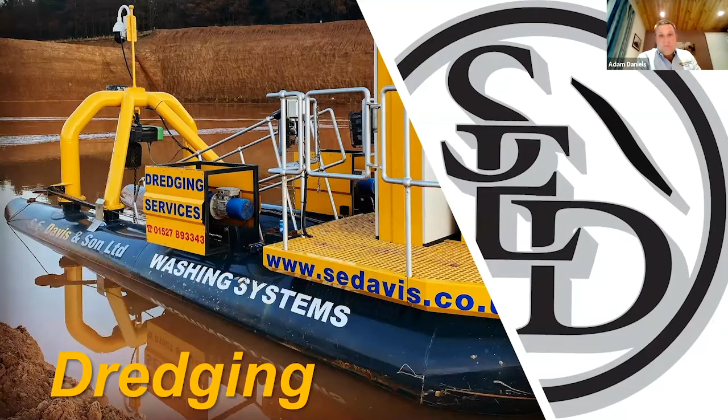I'm Paul Davis. I'm fourth generation of SE Davis and Son Limited from Worcestershire, and we're primarily crushing and screening and plant hire. So the origins of the business: the yard, which is 25 acres, was bought in 1930 off the University of Oxford as a research site. It had been since 1870, and it was where they experimented with bricks and clay. There was a brick kiln on the site, and also a sand quarry.

The farm was bought in 1930 as a derelict quarry, and it was backfilled in 1939 by the War Agricultural Committee. And my great-grandfather, SE, Sidney Ernest, started a chick hatching and poultry business. That grew through the 30s and 40s, Second World War, and in the early 50s, we started in lorries, hay and straw haulage, and moved on to demolition. Demolition contractors all through the 70s and early 80s, when my father took the business in a different direction in the plant hire.

So the plant side of things then really took off, and we started crushing in the late 80s, early 90s, and we travelled all around the country as crushing contractors. By the end of the 90s, things were slowing up a little bit on the crushing front, and we started looking for something else. And in the mid-2000s, we hit on the idea of washing quarry waste in many different forms. And the dredging was born on the back of that.

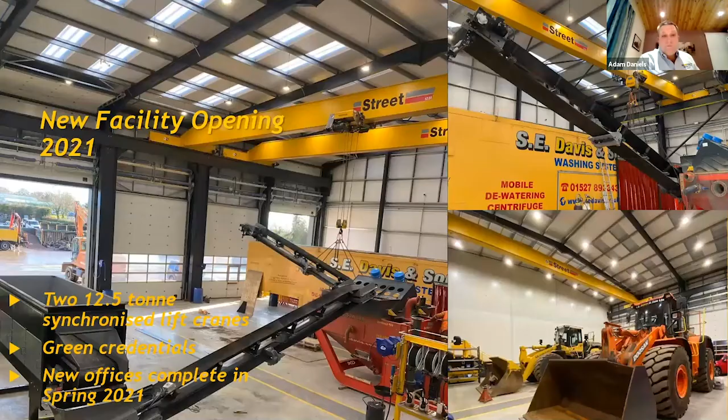We have two 12.5-ton synchronized lift overhead cranes. So we've got 25-ton lifting capacity with all our own in-house fabrication facilities. The plant that's on the screen at the moment is going to Tor Works for a dust washing project, and that's currently being built, due to be finished next week.

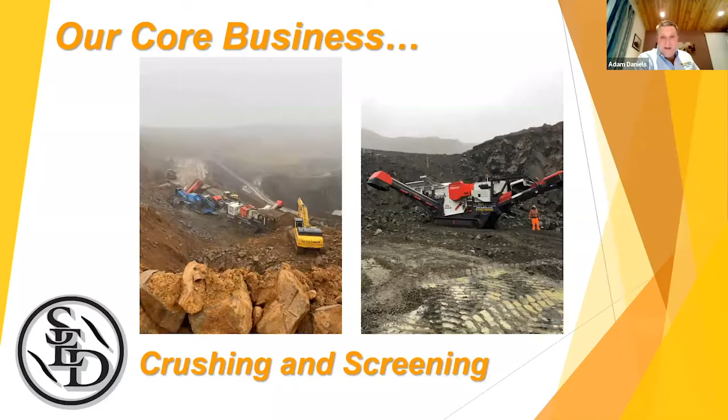Our core business, as I've touched on, has always been crushing and screening and aggregate processing. These couple of pictures here are in Cleal Quarry, where we're processing blasted rock into type 1 and into single sizes. We run 6 crushers, jaws and cones, and 14 track screeners. So, mineral processing is what we've always done.

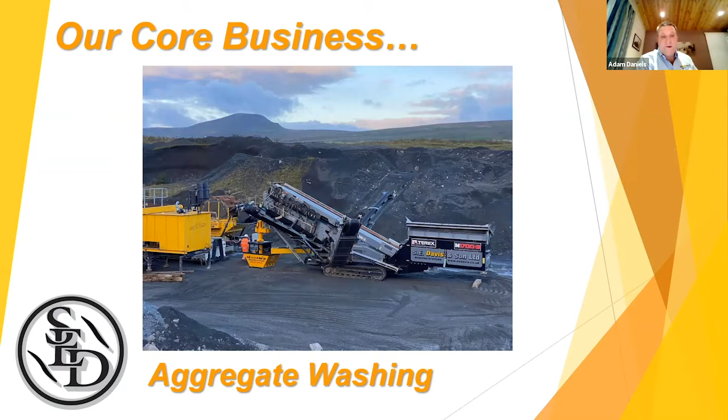The washing plants, as I said, were born out of working in quarries, seeing the heaps of waste and problems, scalpings, dust, anything else that might come about. And we designed our washing systems to be very mobile, very quick to set up, with a very small footprint. We don't need concrete slabs to set them up on. We arrive on site, normally the crane work's done within a day, and we're up and running within 2 days. That's the core of our business.

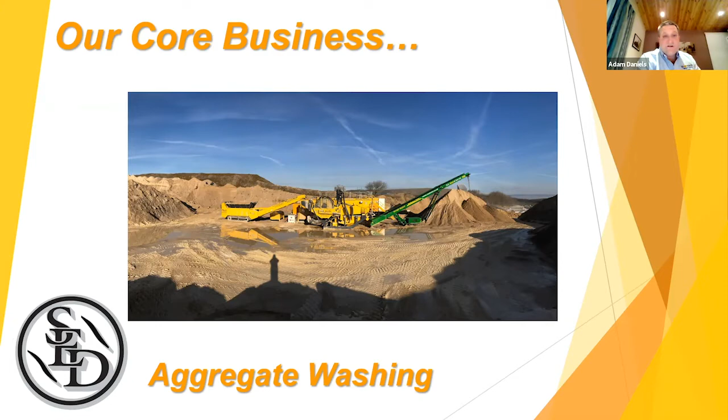Dowlow Quarry, where we were washing dust. We did 75,000 tonne of a 6 mil down dust for them up there. As I said, our plants are modular, and most of them are built by ourselves.

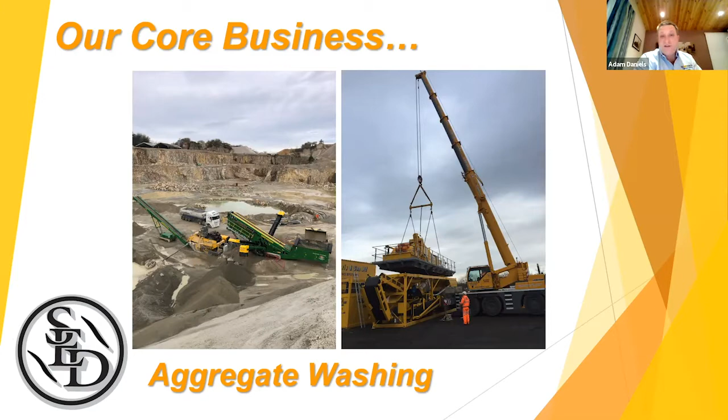We then treat the water through a centrifuge and a settling system, and reuse the water within the system. So washing 1,000, 1,200 tonnes a day, and we're using no more than about 6 cubic metres of water an hour to process that material.

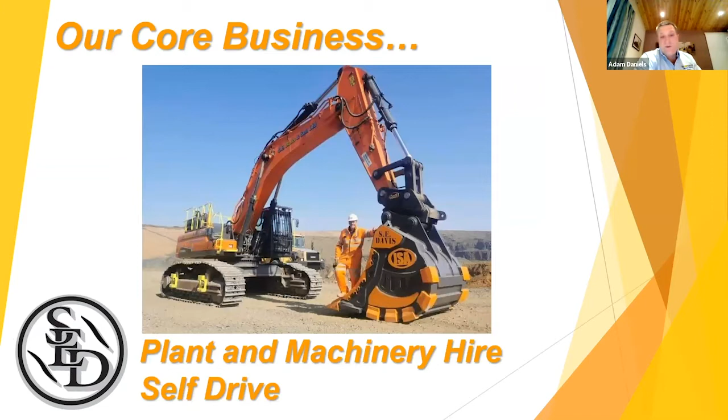We have a large fleet of self-drive and operated plant hire as well. So all of this equipment that we're discussing is building up to the dredging project, because we'd got the infrastructure to start with, we'd got the roads into the quarry, and we knew the people. So it was the next logical step really to do something like it.

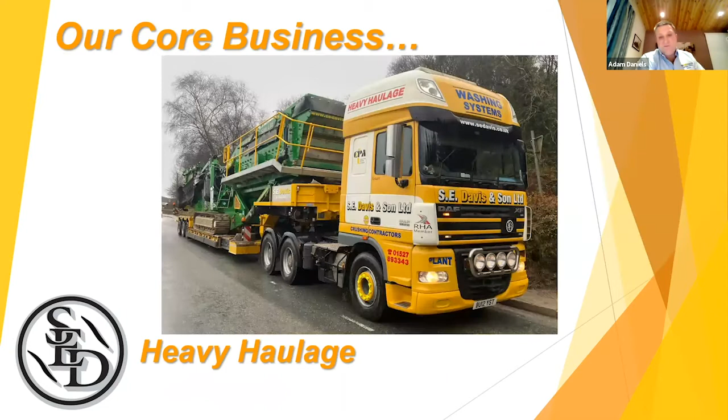We run all our own transport and our own cranes. Most of what we do, we set up ourselves. We run a large fleet of Arctics, heavy haulage capacity up to 70 tonnes, step frame and low loaders. So we're not reliant on other people's haulage. We do everything in-house ourselves.

So how did the dredging come about then? So about 6 years ago, we were approached by Brett Aggregates in Pinewood near Iver to clear a silt lagoon out. They'd had a long reach excavator in, which, due to the nature of where it was, could only reach 6 to 8 metres from the bank, because the silt lagoon was very deep, which then gave them a short-circuiting problem in the lagoon.

We've got a large collection of vintage and classic plant, so we rebuilt a 22 RB excavator, a heavy-duty machine, and we were able to dredge the lagoon for them very effectively. Our wash plant was feeding into the lagoon, so we were filling the lagoon with silt. So if we could offer the quarry a solution to move the silt, then all well and good. So we dredged that 2 or 3 times for them, and it worked very well.

Because we then started advertising a bit of dredging, more people got interested. There was a bit of a campaign on social media, and we were approached by a paper mill from Winchcombe in Gloucestershire about clearing a tailings pond for the paper mill.

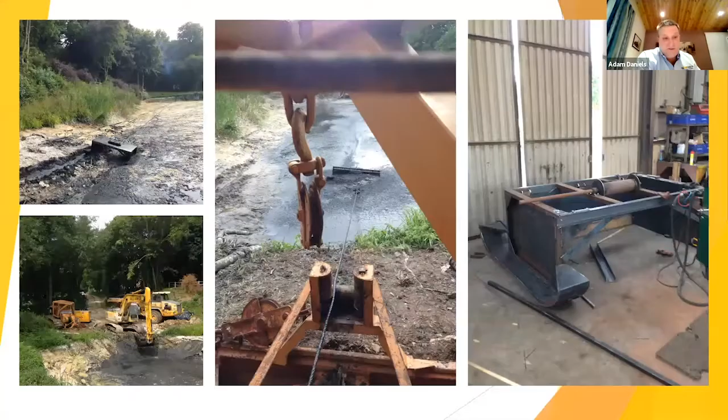So this was a job we did for the paper mill. We used a D8 tractor that you can see in the bottom left-hand picture. It was 145 metres across the lagoon. That D8 tractor was built in 1934. The air conditioning is fantastic, as long as the wind's blowing the right way.

And we pulled the scoop backwards and forwards between the D8 and a Unipower winch tractor on the other side of the bank. And we pulled it up to the front end, and then had one of our excavators loading a 40-tonne truck and tipping the slurry into a pre-made lagoon. And it all worked very, very well. And we could see from that that the dredging had really got legs. There was definitely a market for it.

Nothing more really happened then for a couple of years, other wash plants and various things, until I had a call from Adam from Sibelco. And in typical Adam style, he came up with a list of requirements that were not only impossible, but they were slightly insane. He wanted a dredge that had got no man on.

It couldn't have any diesel fuel or hydraulic oil. No fuels, oils or greases at all on the dredge. It had got to be completely remote control. It had got to dig 5 metres deep. It had got to pump the liquid 700 metres away with a static head of 40 metres.

And I got quite excited and thought it was a brilliant idea. And as a family, as I've said about the family business, we have a meeting on a Sunday night where I sort of come to the family and said, look, I've had this idea. Adam wants us to build a dredge. There's work there for it. I think we can do it. And when everybody had finished laughing, the resounding answer was absolutely not. You must be off your rocker, we're not getting involved with floating things on water.

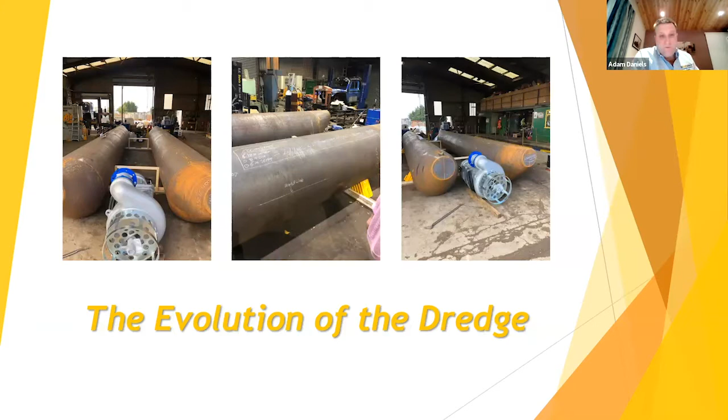So you can see there the 2 pontoons. We spoke to a firm in Italy called Dragflow and got them to design a pump for me to do exactly what we wanted, which was a high flow, low head pump. And the build commenced. We had the pontoons made by a firm in the Black Country who built them to exactly what we wanted. And we set off from there.

Now, as I went on building this thing, it got to a point where it was very nearly constructed. And everybody kept saying to me, well, do you think it'll float like? And it's so demoralizing, really, when everybody who's working for you, including the family, wonder if what you're doing is actually going to work. So I lost the head with it one afternoon, and a friend of mine owns a marina about 10 miles down the road. So I said, right, we'll see if it'll float. Let's go and put it in. So took it on the wagon and took the crane and dropped it in, and it worked perfect.

But the night before, stood in the workshop, everybody was looking around it, asking whether they thought it would float or not. And they got me to draw a line on the side and sign my name above it to see where the water had come to. And I must admit, I was 7 mil out. So it didn't do too bad, really. Now, from that successful test, we went on with the winches and the electrics and got the thing finished.

And this is it going in for the first time in North Devon into the clay works there. And it was good. It performed as well as could have been expected, really. One of the other problems that we faced was how to move the material away from the dredge. The pump will pump up to a 60 mil solid, and with this job we needed to pump it 700 meters, and we got 40 meters of static from the water line up into the lagoon that was made on the tip. So we used an automatically controlled booster pump system.

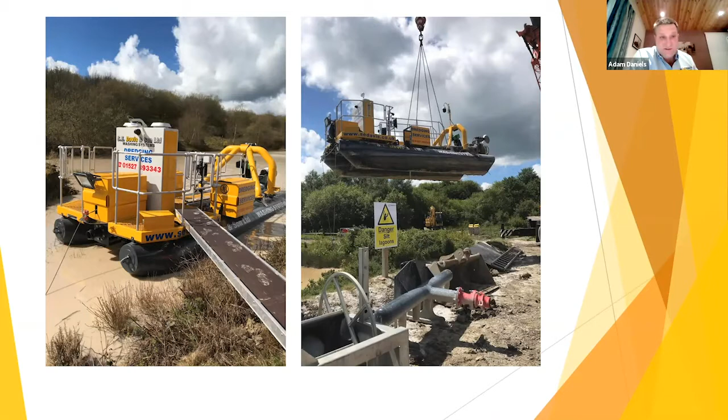So there's no manual handling, there's no joints and lifting pipe work. It's lightweight. It's an easy system. And then at the end, you just reel it back up with a hydraulic reeler on the excavator, and off you go to the next job. Weight was an issue because we couldn't get the crane too close to the edge of the lagoon. So we kept the weight to around about 6 tons. And so the rest of it's history, really. The dredge is controlled by a cabin on shore, and the operator sits in the air-conditioned cabin and watches the dredge working.

You can see on that picture there the 2 winch ropes coming off the front. There's 2 ropes on the front and 1 rope on the back, and you sort of steer yourself across the lagoon in an arc fashion.

So the things that we got wrong when we started, we had the pump sticking straight out the front of the ladder, because the idea was we'd be digging at around about 5 meters deep. So by the time that the head went down, you were at an angle where the pump was very nearly vertical. And then we had the stirrer mounted above the top of the pump with the idea that it would agitate the liquid around it, which worked fine on the Devon clay.

But when we moved up into Cheshire, into a lagoon that had a high sand content, it just wouldn't do it. You were trying to pull the pump sideways into a solid bank all the time. So we made the pump so we could vary the angle of the pump, and we also added a second stirrer and mounted it on the side.

And a little later on, there's a video which you'll see, it was digging sand that was half a metre out of the water down to about 5 metres in the lagoon there up in Cheshire. And we were pumping that around 850 metres to its final destination.

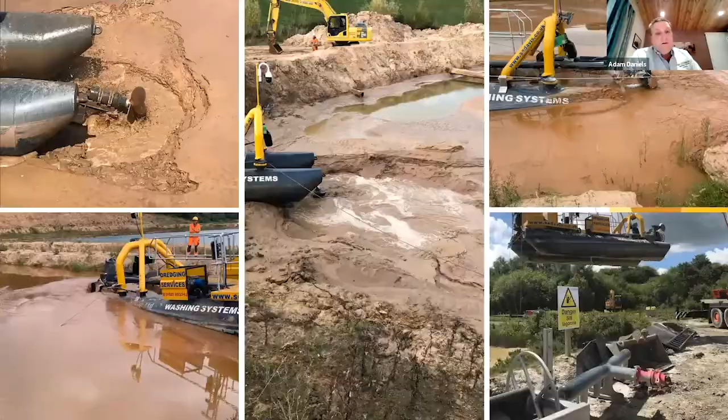Some of the lagoons we go to have got very little water in them to start with. And you can see the centre picture there. We got dropped literally onto a sandbank and had to excavate our way into the silt. And as you can see, it's mostly sand, fine sand in that lagoon there. So we were digging the sand and pumping it out. We created a hole, and then the boat sort of slithered into its own hole, and then we set off dredging.

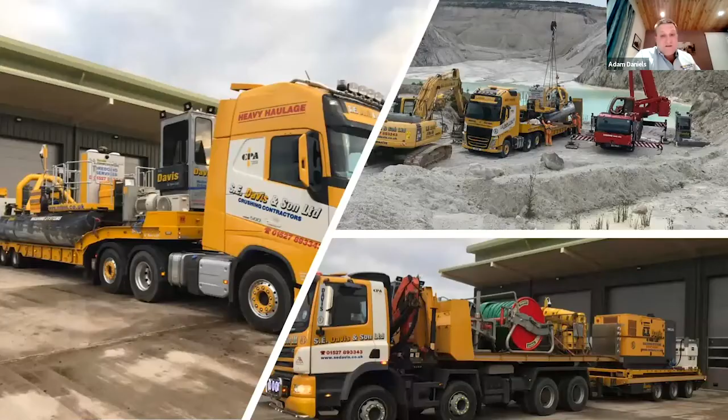The bottom left-hand picture, that's working on ultra-fine material. That's a silt that's been settled after an ultra-fines plant. There was no freeboard or water at all. That was like being dropped straight into custard, effectively. And the pump handles that, no problems at all. We can pump up to 30% solids with the machine. Obviously, then dealing with that liquid is the next challenge. So we've developed various ways of dealing with the silt.

Most places want the operational lagoon emptied. In the top right-hand picture there, that's a lagoon in the bottom of a China clay pit down in Cornwall, on the Devon-Cornwall border. And we were actually pumping that material back into the process plant. So there was no wastage on that job. Everything we pumped out went straight back into the plant, and then the kaolin was recovered from it that way.

With the washing systems that we have, we can pump the material that we're excavating straight into a mobile sand plant and a dewatering plant, and give you a product directly off, if you like. So a fine sand, or in some cases a coarse sand, straight off the sand plant. Then we can treat the water, put the silt through a centrifuge, return the clean water back to the pond, and give you a handleable cake out of the centrifuge as well. So if you need total lagoon cleaning, then that's an option as well.

The biggest benefit, I think, to this system, one is the safety aspect. You're not working an excavator right near the edge of the bank. Two, you're not spilling slop and silt all over the quarry floor when you're trying to excavate out of a hole and move it with a dump truck. It's a much more efficient process. It doesn't need 2 men.

One man is operating the machine. The other man, really, because you're working by water, is acting as a lone person supervisor, if you like. And it's relatively low impact. Diesel usage, we're somewhere around about 220 litres a day for the generator that powers it all, and that includes all the booster set and everything. We have the excavator on site to act as a moving anchor to help us position ropes and various things around the lagoon. And it's a simple system, really, with very little mess.

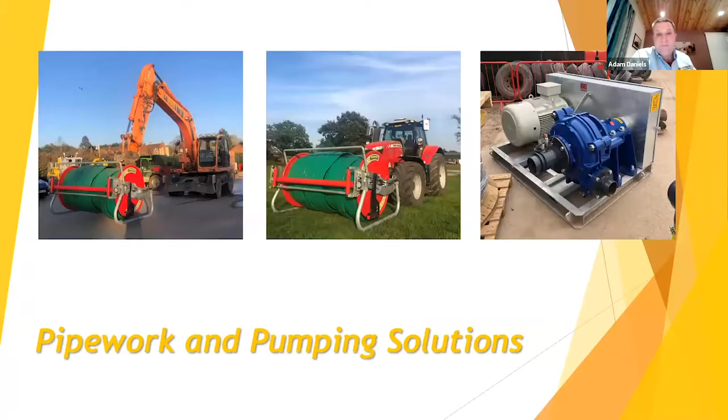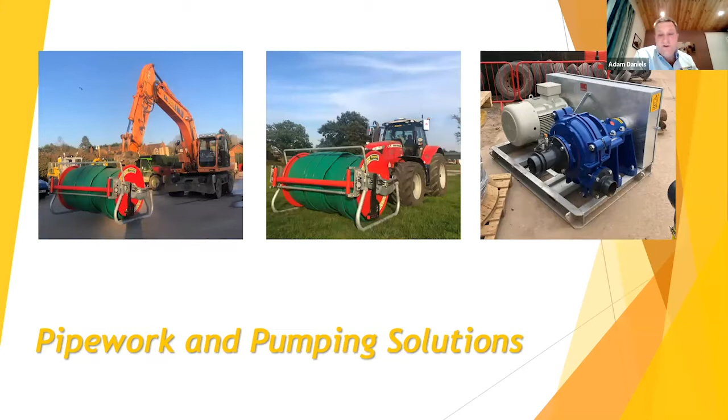As we talked about the pipe work, we had a heavy duty reeler made for the pipe work. The reeler can be mounted either on the front of the tractor or on an excavator. We tend to use the excavator mount for putting the pipe work out, because you can position the reeler much more effectively. And then the booster set that we built there, which is a 6.4 EAH Warman, which will do 75 metres head at round about 180 cube an hour. Most places we work, we're around about 40 metres head, and we can do sort of 250, 260 cube an hour through that unit then.

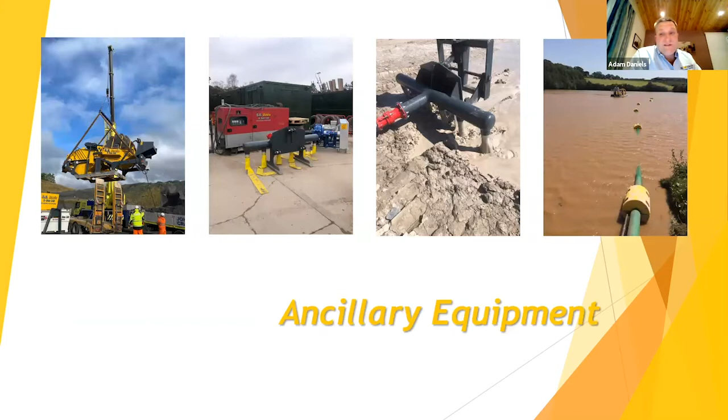The ancillary equipment, this is dealing with the dirty water again, if you like. Sand plant in the left-hand picture, we can pipe directly into the sand plant and recover the sand. The middle two pictures are a dribble bar, which will fit either on an agricultural tractor or on an excavator. So up in the North Devon Clay Works, we actually capped an old tip. We put a layer all over the tip using the excavator and the dribble bar. You can see it coming out of the nozzles there. It's quite thick. It's a good consistency, which we just track the machine about. Then the umbilical pipe work follows you up and down the tip, and you just put a layer all over the top of the tip.

So handling the sludge is a possibility. It isn't an issue. We run mobile flocculation systems as well, so we can pump flocculant into the dredging line and settle the solids quickly in a small space, and then return the water back to us. That's another add-on that we can add into the system. We'll do all our own testing. We're agents for Kemira flocculant, so we can supply the right powder for the job and sort of move forward like that, really. There's a video now. I'll shut up for a minute and let you enjoy it. This was taken up in Cheshire for Sibelco, operating in one of their sand sites.

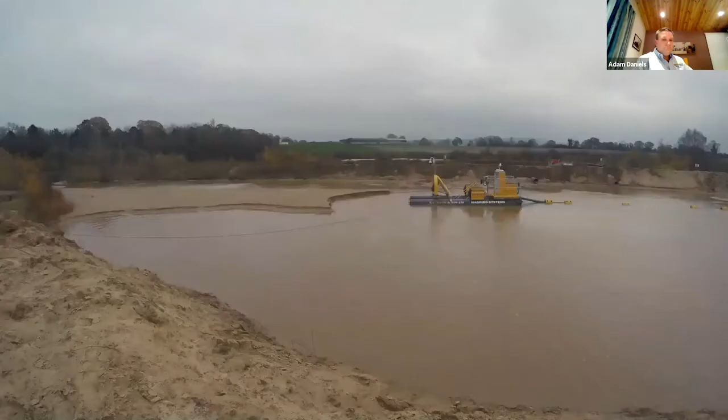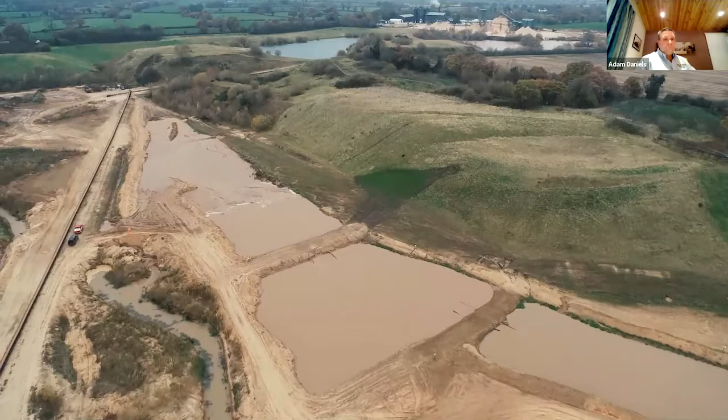You could see that the middle of the lagoon had been left. The outside had been dug with an excavator some months previous, but it's as far as he could reach, and that was about a 45-ton long reach excavator, but couldn't get to the middle of the lagoon. And what basically happened was he dug all around the outside. The lagoon then lost its settling capability, and you effectively dug a ditch all the way around the outside. So where the infeed was going, it just raced around the outside straight to the outfall. So you didn't have the settling anymore. So that's obviously why the dredger then worked well, excavating the middle out to give the lagoon its depth and its capability back.

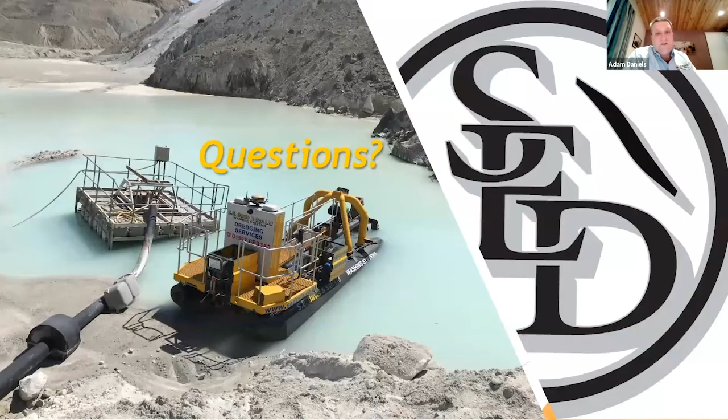This is just a very short video of the density of the sludge coming out of the pipe. That was recorded at 1.32 density. So it's pretty thick stuff, really. If you've got any questions, then I'll be happy to answer them for you.

Thanks for that, Paul. That was very interesting. Showed great innovation around the problem. Very impressed. What I was thinking, Paul, you've sort of bolted on lots of different applications depending on the mineral and so on. But would you change anything for the original dredge? Because it looked as though it stayed the same.

The actual vessel itself, I wouldn't change a lot about it, really. I'll talk a little bit about the future in a moment, but no, the actual vessel itself works very well. The only thing we've made the major modifications to really is the ladder design in the middle and the way that the pump is mounted. I think the future really for us is to try and make a machine which is self-moving now, so we don't need the winch ropes. Getting anchor points can be an issue in some quarries.

So I think the next thing really is to try and make the vessel move itself, walk effectively to where it needs to be. Then we don't need the crane to be able to launch it. And there'd be a lot more areas we could actually get to if we could make the thing self-moving.

Thank you. Hiya, Paul. Hello, Rob.

It was really just to let people know that the machine really does what it says it does, but we got caught out with a catchment area. We thought we created three lagoons to catch the slurry, and it wasn't long before it filled up. And the point I'm making is you'd be surprised how quick this machine does move the product.